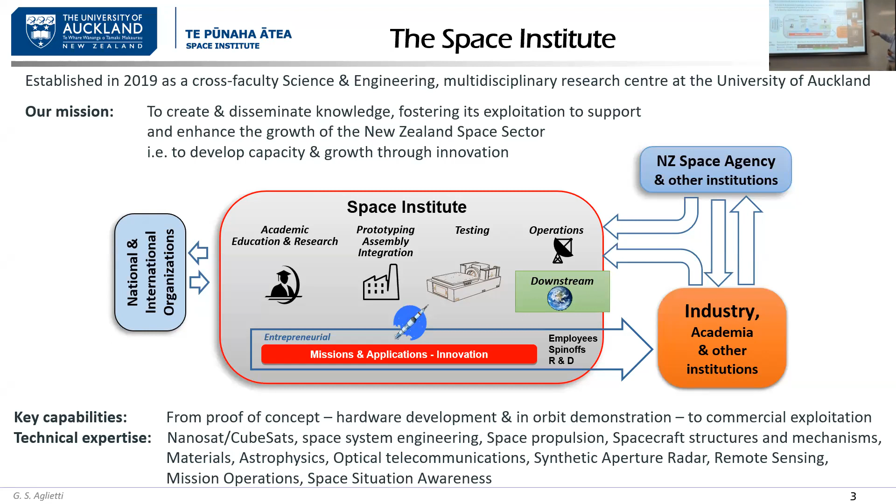As you can see from this diagram, we engage with international organizations, with industry, the space agency. So if we start to unpack a bit what there is in the Space Institute - there is a mismatch between what there is here and what there is there.

There is a bit of a delay here, but okay. If we start from the academic stuff - when I arrived, about 2.5 years ago, I noticed that in New Zealand there wasn't really a course in any university that was covering space or aerospace, and the sector really wanted to have people with this kind of expertise in order to grow and hire new staff.

So we set up a new course, a new master in aerospace engineering, and various other educational activities. And again, we started also a lot of research activities.

Some were already going on. There were also some activities with the APSS, for example - I'm sure you are aware about those. But again, we started also to develop further space technologies.

And in particular, there is a growing research group in space situational awareness. Maybe in one of these sessions in the future, you can have speakers specifically about space situational awareness.

And then if we talk about the various areas here - prototype assembly and integration - that's important because, again, when you have your ideas, it's important to actually see if these ideas work in practice.

So there is an area of the institute where you can actually go and try these ideas, put together your bits and pieces. We have a clean room just across the corridor, where you can start to develop your particular piece of technology.

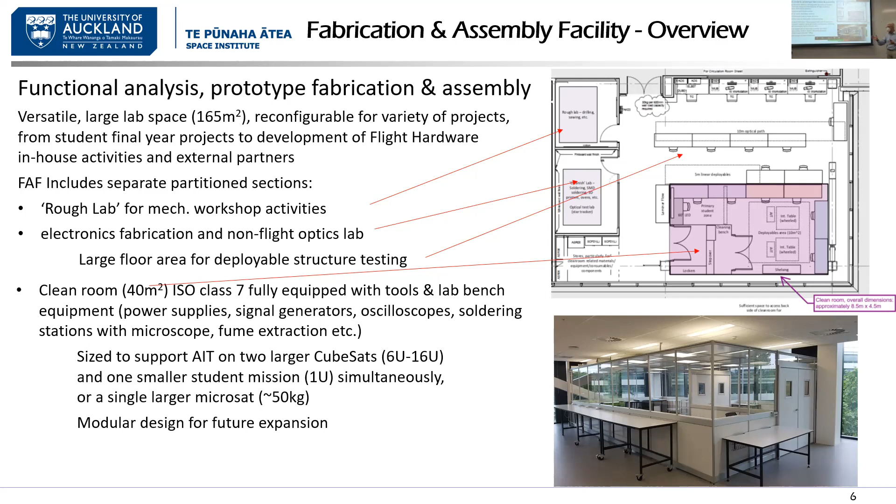But again, something has also been sized in the test facility to deal with stuff up to 50 kilos, which would be for a university facility quite a significant size satellite. All modular, so we will see how things go, and certain areas can be expanded or contracted.

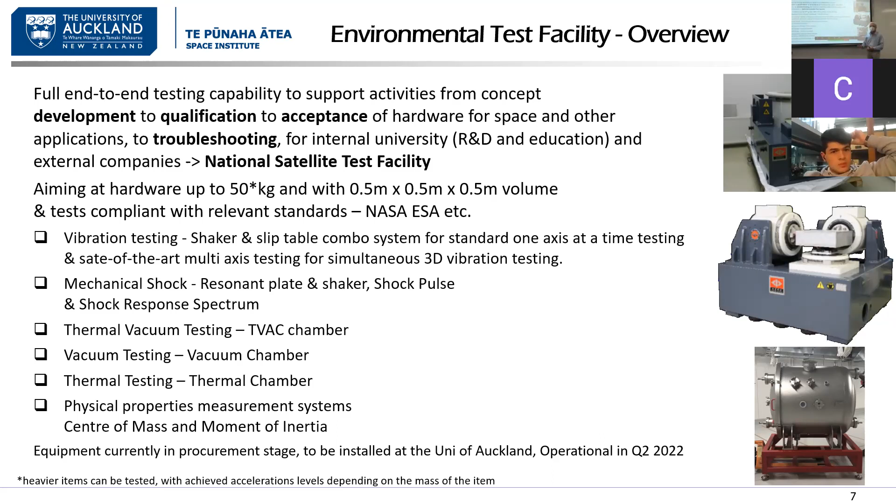With these facilities you test and make sure that the various technologies you are working on really don't fall apart due to the vibrations during launch, and once they are in space, they can really operate. There are other pieces of equipment downstairs to test, for example, mechanical shocks and other things that happen during launch.

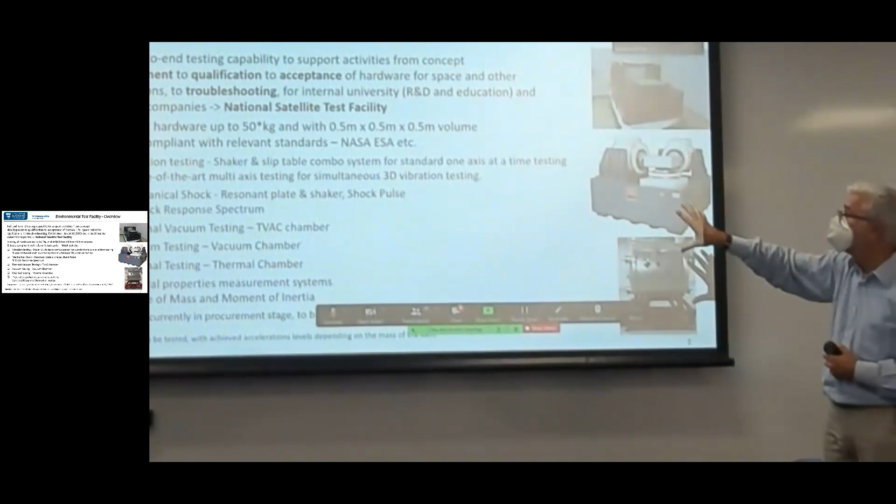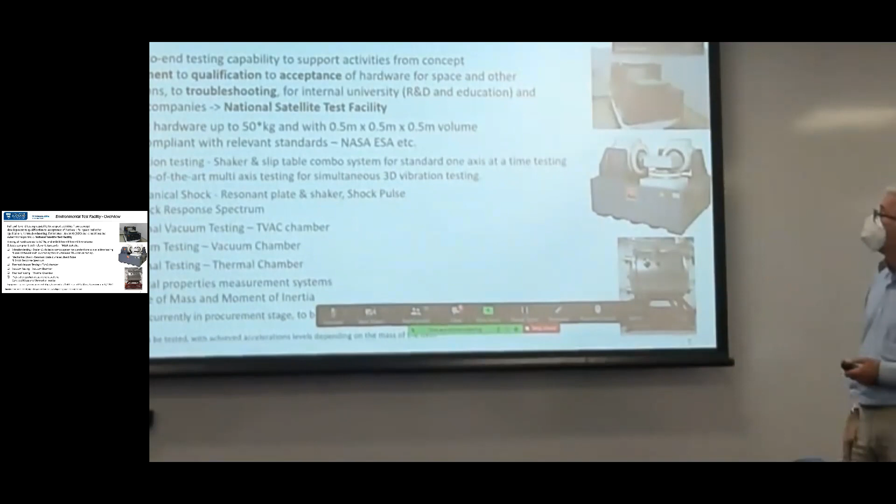In New Zealand this would be the only public, let's say, facility able to do this kind of test, because clearly there are companies that have this type of equipment, but they are private companies using these things for their own use. Instead, here we have equipment that will be used by ourselves for our research activities, our students, but also other little companies around New Zealand, startups, spin-offs and so on that don't have their own facilities, so they can come here and utilize all these things to prove their technology, without having to buy any of it themselves, because as you can imagine it's pretty expensive business.

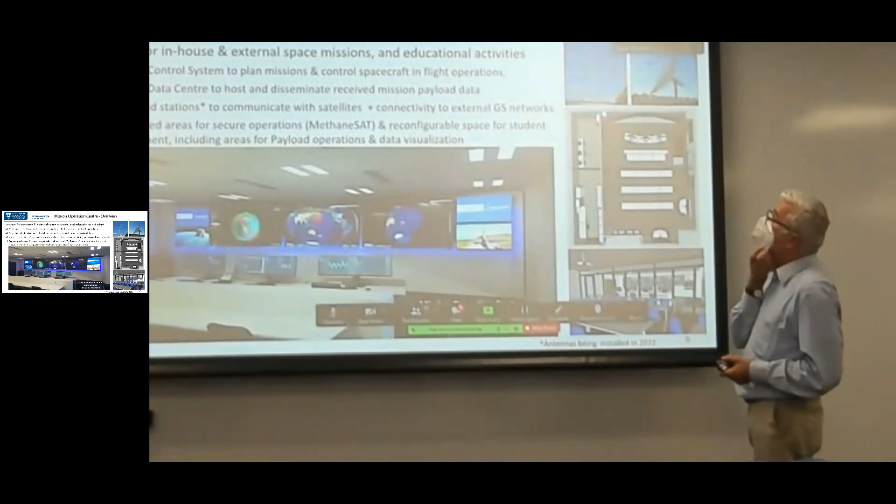And then again, the room where we are now, the Mission Operations Center, is connected with antennas that are not here on the roof, because that was a significant challenge. The antennas are in a field about 20 kilometers south from where we are now, but they will be connected with the Mission Operations Center, because it's important to be able to actually test the technology in space.

This room is so big and has got this particular layout that can be modified, because the idea is that it can also be used for teaching. So part of the courses we've seen before are actually about showing students how you really run mission operations - not just from the book reading the equations for the link budget, but actually students will be able to come here and see in detail how you run the operation, how you send the signal to the satellite, what you receive back, how you really operate things in reality.

If some of you have looked carefully at these pictures, you'll see that here there is a separation, which is not in the room at the moment - this one here. The idea is that in a few months we will have to put a separation in this room, but it will be something transparent that can be open, because sometimes there are things done in the Mission Operations Center that are a bit sensitive.

So you don't want people in the corridor coming in and looking what you're doing. So with this type of partition, you can obscure the partition, so it creates a safe area where you might want to do some operations and so on, and vice versa. In other moments, you might want to open the whole thing, so students can actually see what's going on, and you can use this for teaching workshops and various things.

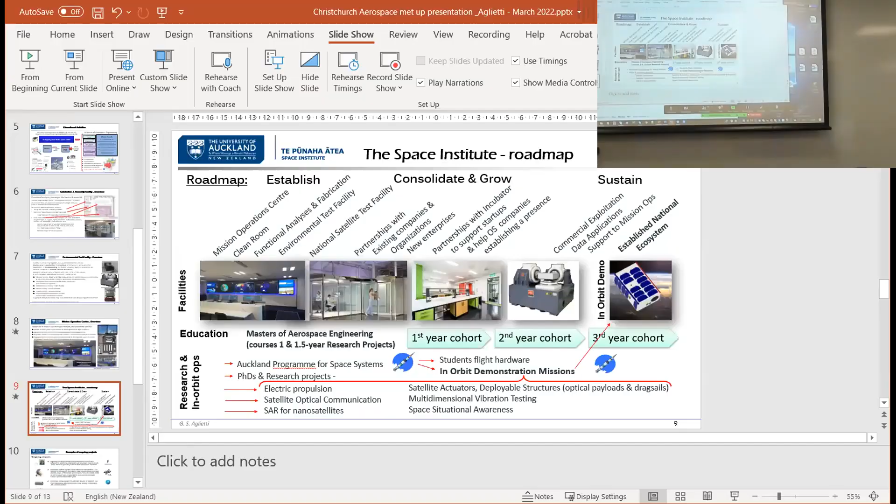So I will stop here. I don't know if you want to do questions now or later. Up to you. Shall we go to the next presentation? Were there some volunteers, or should I just assign a name? You can. I can take the mask off, you said? Yes, please. Should be fine.

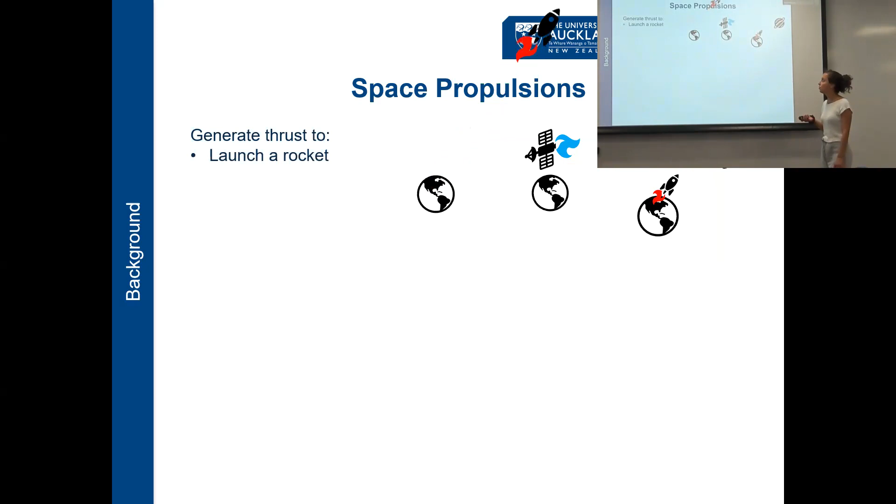So, what is space propulsion? Propulsion systems are basically the subsystem of, for example, a rocket or a spacecraft, and they're used to generate thrust. For example, if you want to launch a rocket into space, you're going to need a propulsion system. If I want to change the attitude and orbit of a satellite, that is done through propulsion systems. But also if I want to send a spacecraft to another planet or another satellite.

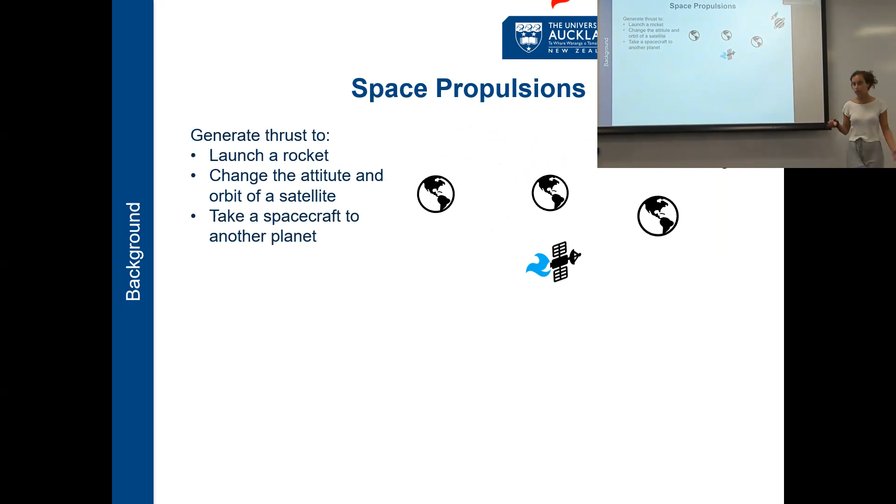There are two main categories of propulsion that you can have for space applications. One is a chemical propulsion system. Basically you're burning fuels, you're having a combustion reaction, and that's going to create your thrust. The main example is rockets. Rockets are launched through chemical propulsion systems.

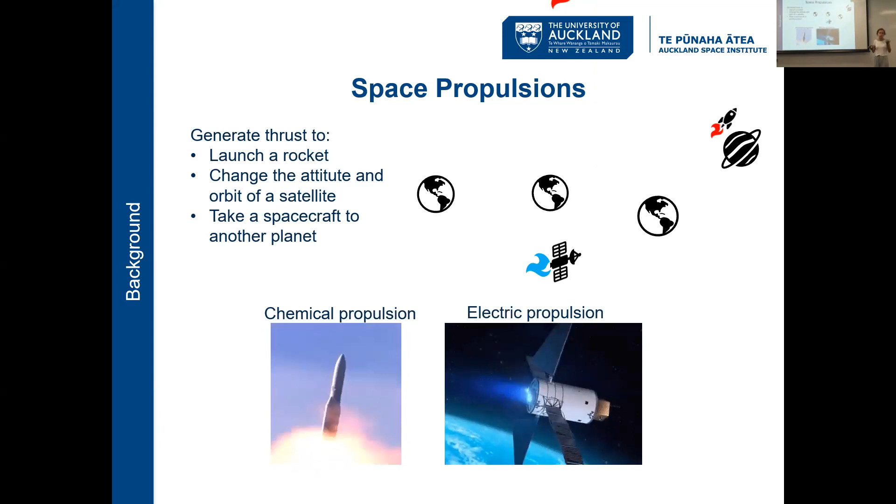The second big class of propulsion systems is electric propulsion. Basically you're using electric power, and that can be, for example, electrothermal energy or an electromagnetic mechanism, and that is what creates thrust.

As I mentioned in my presentation, I'm specifically working with what is called a radio frequency plasma thruster. I don't know if many of you are familiar with what a plasma is. Basically, a plasma can be considered the fourth state of matter. You have a solid, you heat it up and you can get a liquid, you heat it up further and you can get a gas. Then if I give more energy to the gas, what I can have is plasma.

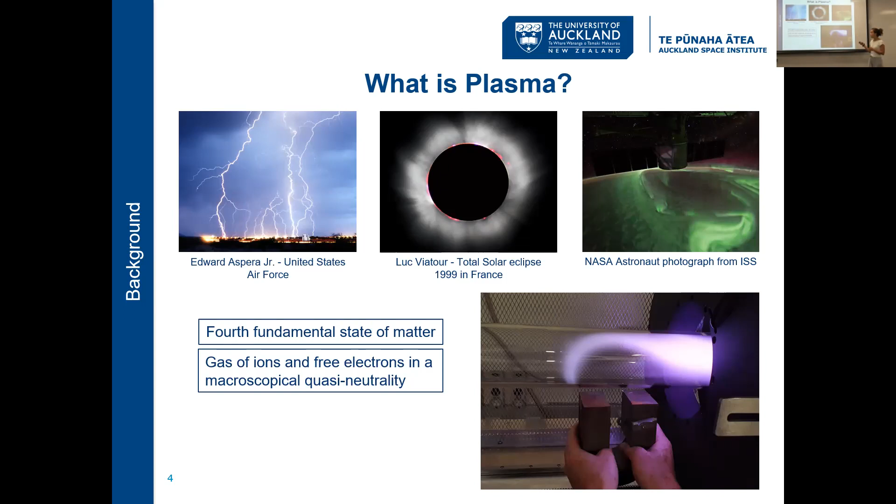You can think of plasma as basically a gas composed of ions and free electrons that maintain quasi-neutrality. Examples of plasma are lightning, which is an example of partially ionized plasma. All the stars, and also our sun, are made of plasma, but also the upper atmosphere, the ionosphere, is made of partially ionized plasma. And what causes the beautiful auroras is also plasma interactions. And here you can see a picture of us having fun in the lab with the plasma.

Because of all the physical mechanisms that govern the plasma, we can use electromagnetic fields to control the behavior of the plasma. So what are radio frequency plasma thrusters? They are a new technology of electric propulsion system that has been studied for the last 20 years. The plasma is produced by an electromagnetic mechanism that, put very simply, heats up a gas, and then you start having collisions between the atoms and electrons, and that is what creates plasma.

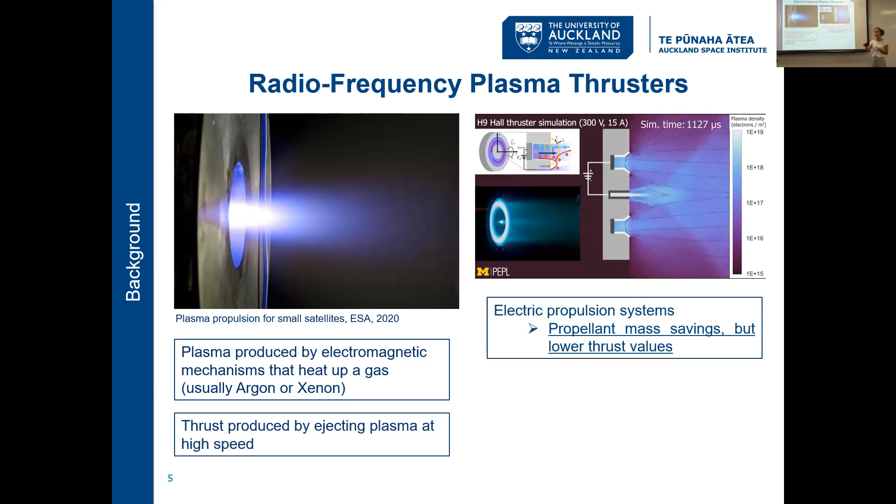What's an advantage of electric propulsion systems compared to chemical propulsion systems? If I want to move a satellite from point A to point B, I have to produce a certain change in velocity. To produce this change in velocity, if I use an electric propulsion system, I'm going to need less propellant. If I have less propellant, my whole system is lighter, my satellite is lighter, so it's also cheaper to launch. One disadvantage is that the thrust value is actually lower. So to go from point A to point B,

Okay, so to go from point A to point B is going to take me a longer time. That is not a problem if I don't have a time constraint on my space mission. But, for example, if I have a human mission, then a time constraint is a problem. So for now, electric propulsion systems have not been used yet on manned missions.

And last thing, an advantage of a radio frequency plasma thruster is that it has a relatively simple design. It doesn't use electrodes, it doesn't even have a neutralizer, compared to what is commonly used in electric propulsion, like Hall thrusters. So in theory, they could have a longer lifetime.

And now, as I mentioned, my PhD title is... There's a question, I think. We can go through it at the end, maybe.

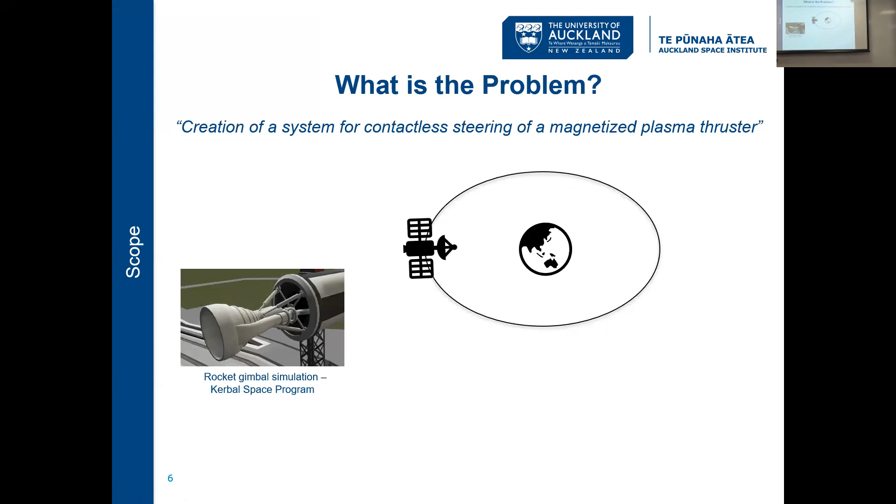Okay, yeah, it works. So as I was saying, up until today, the thrust vector of a spacecraft has been done by using mechanical systems, and that could be either a gimbal mechanism like on a rocket, or you can have vernier thrusters or reaction wheels. The mechanical system means that you have parts that tend to be pretty heavy, but they also move. So that could potentially add some failure modes to your mission.

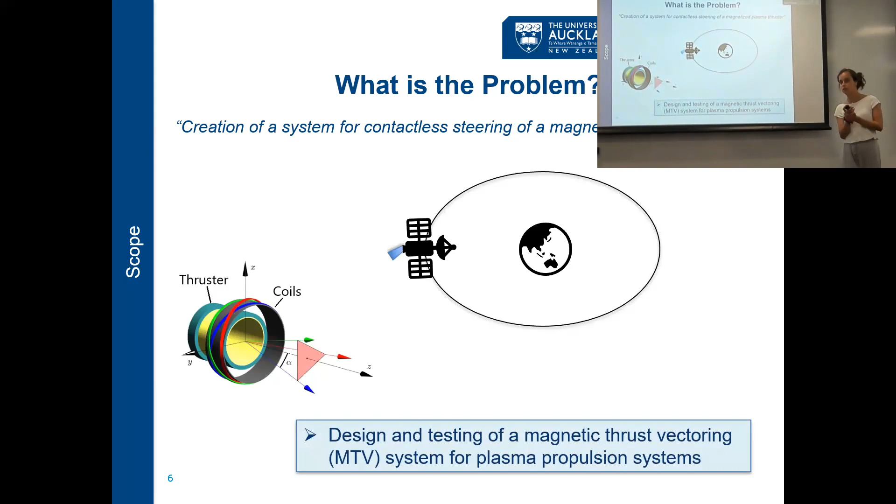So the idea is that for the radio frequency plasma thruster, as I said before, the plasma behavior could be controlled by electromagnetic fields. What you could do is control the magnetic field to actually control where your plasma beam or plasma plume is pointing. And so the aim of my PhD is to design and test a magnetic thrust vectoring system to use on plasma propulsion systems. The basic idea is I have 3 coils that are concentric within my plasma source of thruster, and by varying the current in each coil independently, I can control where my thrust is pointing.

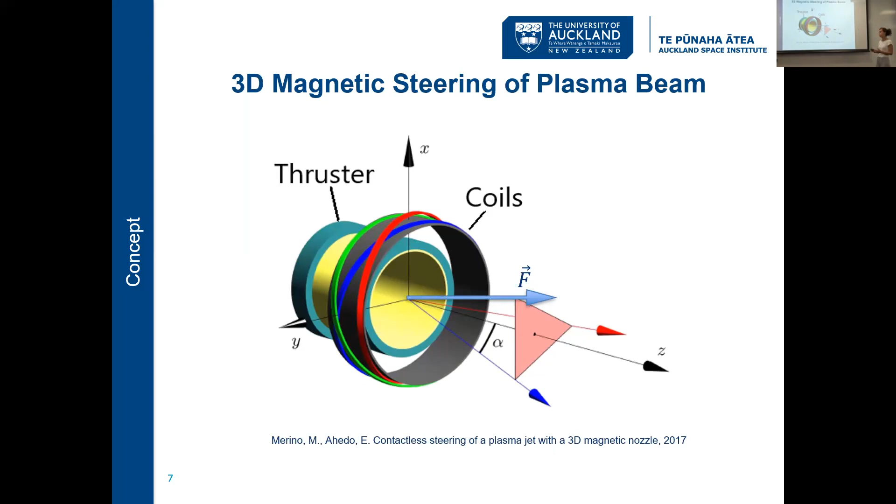These coils basically produce what is called a magnetic nozzle. So instead of having an actual physical nozzle, I have a diverging magnetic field that acts as a physical nozzle. And so, for example, I can play with the currents in my coils, change the magnetic field orientation, and boom, change the thrust vector. Now, this hasn't been tested before in this kind of system in 3 dimensions. So it's going to be interesting to see how the plasma would respond to such an asymmetric magnetic field.

And so how are we approaching the problem? By doing experiments. This is the setup that we have now in the Department of Physics in a lab, and it's brand new, like a month old probably. For my PhD, I'm working with 3 main components. This is the vacuum chamber, where the plasma will expand. It's a chamber in which I'm simulating the space environment, so I have a very low vacuum, basically to have an atmosphere-free environment.

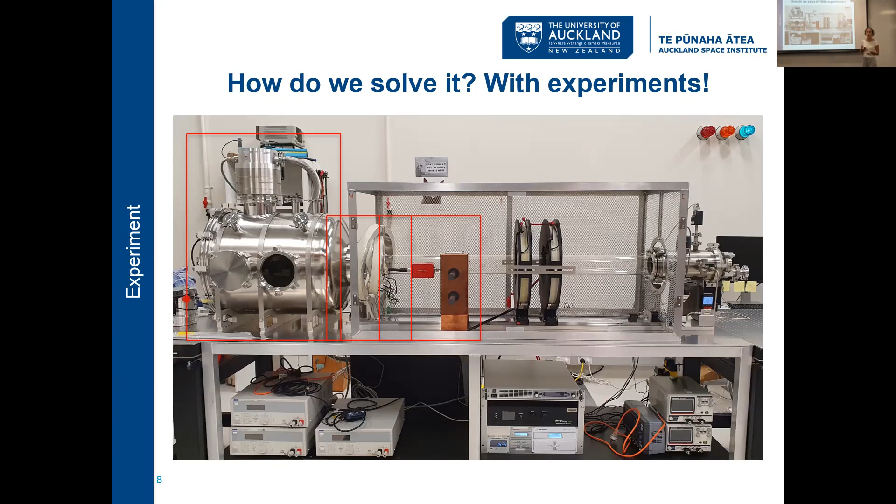Then those are the 3 coils that I will use to try and steer my plasma plume. If you can see, they have a kind of weird 3-dimensional rotational symmetry alignment, because I want to use these 3 coils to control my plasma in 3 dimensions. And then I'm going to use this, which is the matching box plus an antenna, and by feeding it RF power, it actually creates the plasma from the gas. And this is a nice picture of when the plasma is on. It looks like a lightsaber, probably.

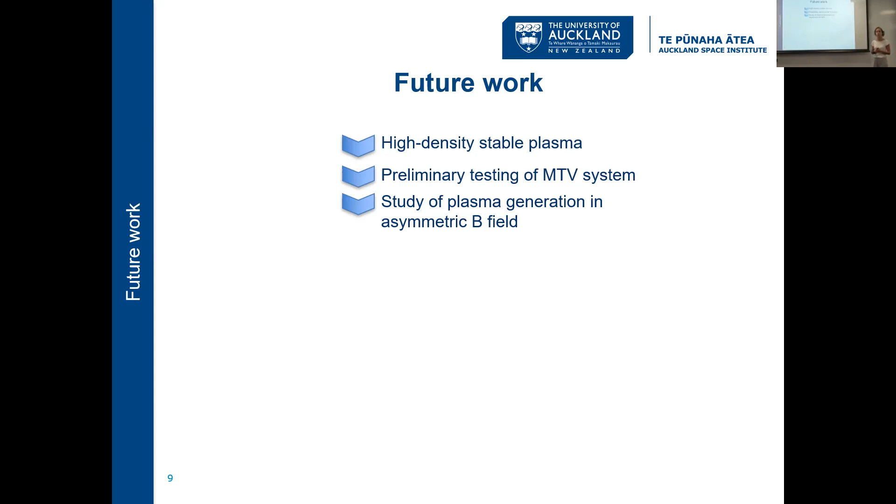So right now I'm trying to have a high density stable plasma in the new experimental setup. Once the deed is done, I can start preliminary testing of the magnetic thrust vectoring system. Then I would like to look more into the plasma generation mechanism in a non-symmetrical magnetic field. And of course, I will need to do 3D mappings of the vacuum chamber to characterize the plasma and see the plasma properties in such a magnetic field system.

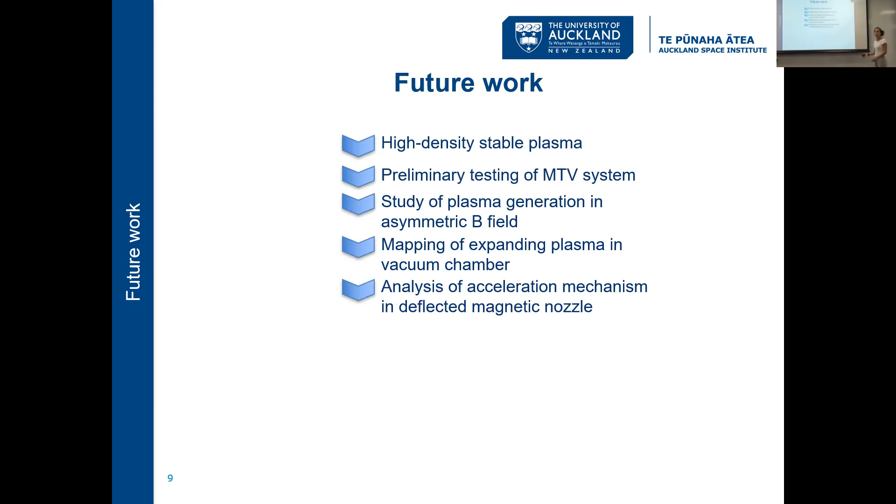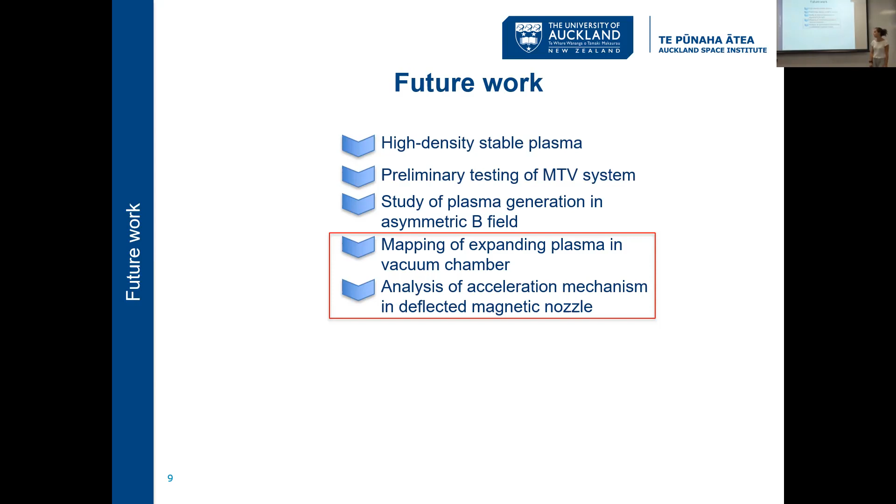And finally, I will look into the acceleration mechanisms that happen in a deflecting magnetic nozzle to see if all these systems can be used for quantitative applications or not. Those 2 last points of my future work are probably the biggest part of my PhD. And that's it. Do you guys have any questions?

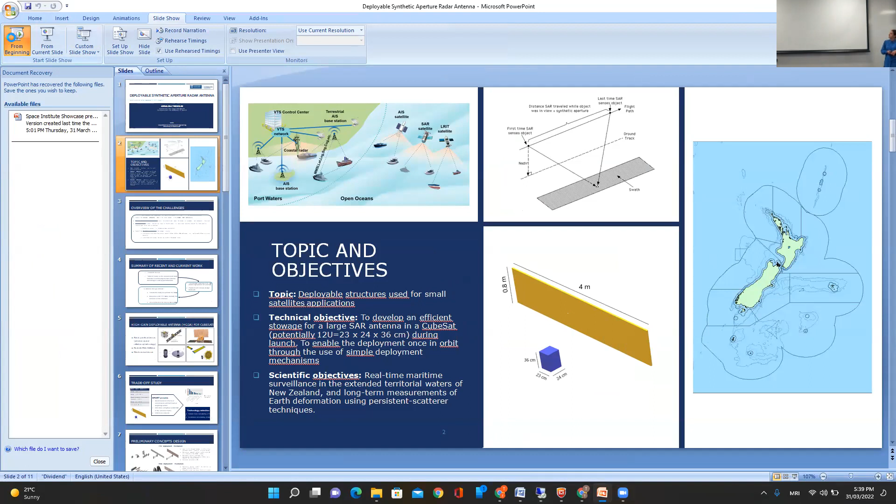That's the end of that. There. Okay, I think that, yeah, it works. Okay, share it onto the... Yeah, you have to share also. Yes, okay, here we go.

So, hello everybody, I'm Annalisa and I'm a PhD student here at the Space Institute. Today I'm going to show you in a few slides what my project is about and what I'm currently working on. From the title itself, you can easily get the field of my research, which is deployable structures. In particular, I'm trying to develop a nanosatellite concept of a deployable antenna, which is supposed to be implemented with a synthetic aperture radar.

So, what is the main topic of my research? Basically dealing with deployable structures that are commonly used for small satellite applications, and in particular, trying to find out which deployable structures and deployable mechanisms can be used to store and fold a large space instrument that needs to be folded compactly during launch and then deployed in space once in orbit.

In my case, my large space instrument is a deployable antenna of 4 meters length and 0.8 meters width, which aims to be implemented with SAR technology that so far has mostly been implemented in large, heavy and costly satellites. With my project it aims to be implemented in a CubeSat, which is the smallest category of satellites. We hope, of course, to do so with a simple deployment mechanism.

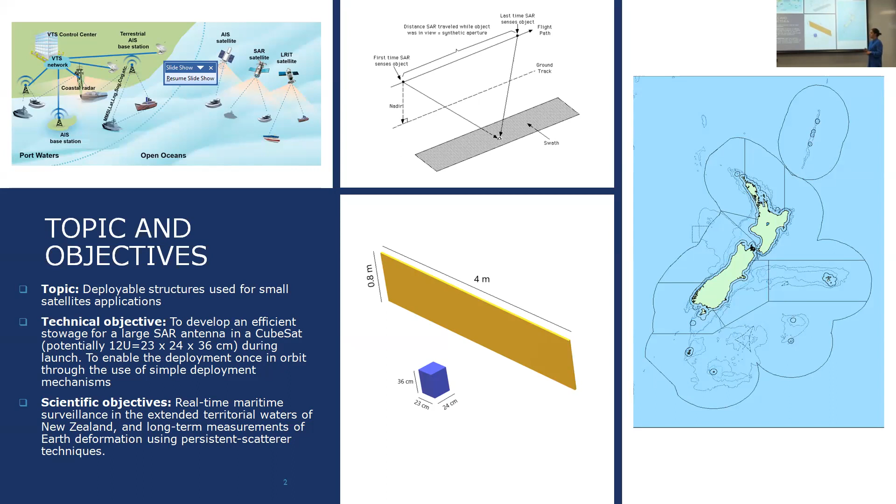What can the scientific objective be? It could be maritime surveillance in the extended territorial waters of New Zealand, for example detecting illegal shipping, or long-term measurement of Earth deformation.

There are a lot of considerations when dealing with a new project, for example a PhD project, and here I sum up the most critical challenges of my project, to help myself focus on the possible points of innovation and novelty, because, as you can imagine, most research has already been done, so your work should be unique and full of points of novelty. Here there's a list that I'm trying to

explore step by step. The first is the required trade-off between the minimum achievable size of the stowed antenna while maximizing the SAR performance. Following, it's the requirement to minimize the mechanical complexity of our system in order to avoid low reliability, but also to reduce as much as possible the number of components.

Another important step is the material selection for this antenna structure. The material choice is very important because the material should satisfy the mechanical requirements, but also reduce the electrical losses for the radio frequency system, so the antenna works properly from an electronic point of view.

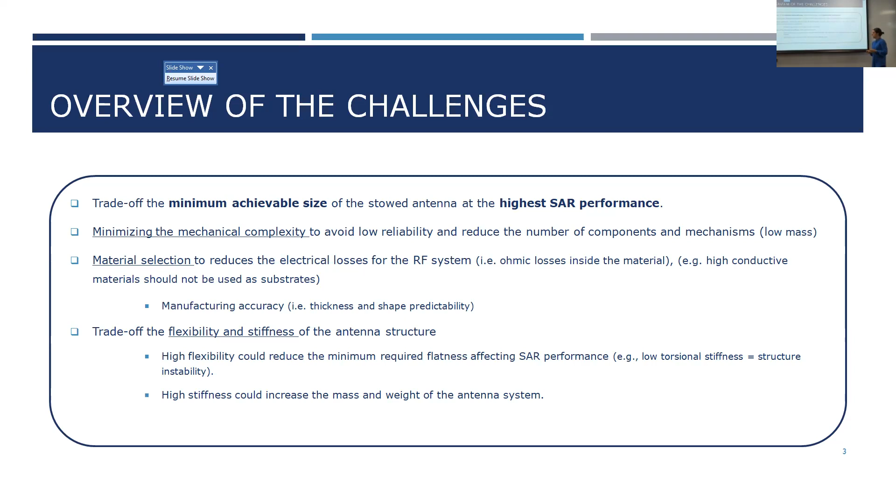A few months ago, I started my second year of PhD. During the first year, I conducted an extensive literature review on the most commonly used deployable antennas implemented with SAR. Then I set up a trade-off study to evaluate which of these deployable antennas can be suitable for a CubeSat application.

Most of these antenna technologies are used for very large satellites, and now what we are trying to do is find out which technology can be suitable also for a CubeSat application.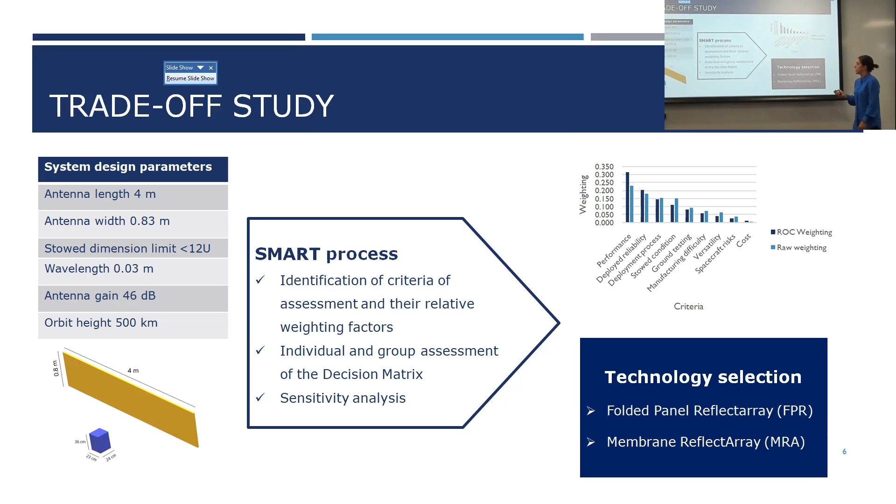We also conducted a sensitivity analysis with which we assess, evaluate, and also verify the robustness of our results. So the baseline concept that we achieve is a folded panel reflectarray, which can be resembled by these, and the second one is the membrane reflectarray, both with our reflector array technology. So here we suggest 2 deployment mechanisms for the folded panel and the membrane reflectarray.

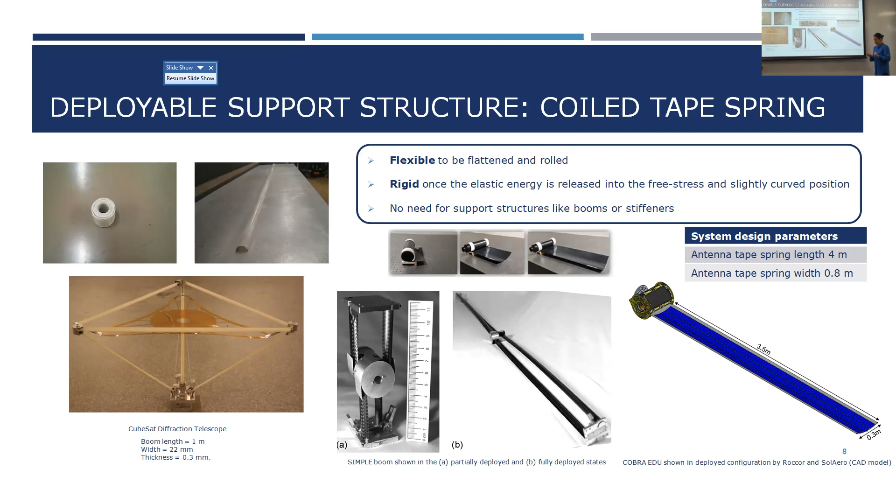In this case, it's a 3.5 by 0.3 dimension size, which is almost the one that we want to achieve. In this case, a solar panel structure. What I'm currently working on is the building of a parametric study.

Because I have very few system design parameters at the moment, I'm trying to find out which could be the optimal solution. So I identified some critical design variables.

As you can imagine, curvature is very important to gain stiffness or flexibility, so I'm trying to vary the curvature and thickness of the tape spring for this huge antenna, and also different material types. As I mentioned before, material selection is very crucial.

I'm trying to vary all these variables, looking at glass fiber, carbon fiber, composite, and so on, trying to find the optimum by conducting structural analysis and evaluating the first and second natural frequency of the structure, as you can see in some examples above.

I just want to identify which configuration is the most stiff, so that once the antenna is fully deployed, it can ensure it stays there.

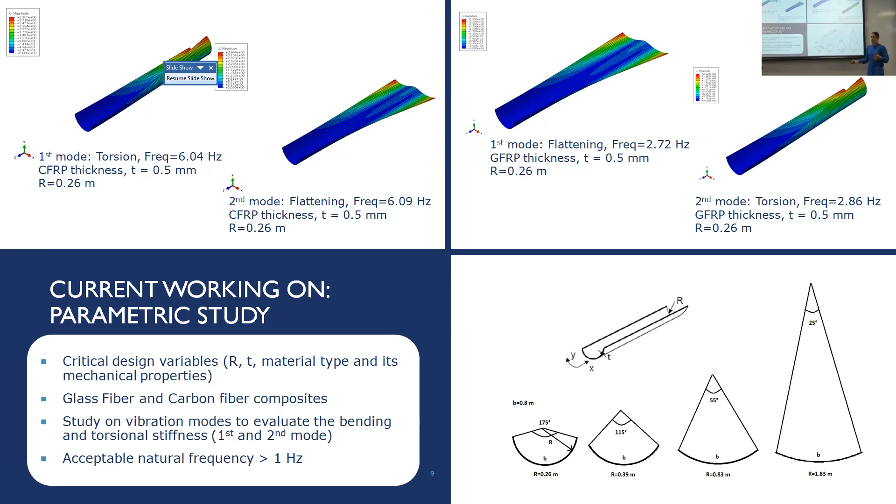This is the last slide, and then I've done. What can be the potential points and future work? Once I've defined the material and design configuration, I can move towards the deployment process, starting from finding the minimum radius of coiling without incurring failure of the material.

So cracking and micro-buckling and every kind of failure you can imagine. Then I will try to evaluate the bending and stretching energy of the coiled tape spring in order to evaluate what the requirement is to deploy the antenna.

This antenna aims to be deployed by itself, just thanks to the stored energy in the coil configuration, which is released once in space. I reported this example of a drag sail coil configuration, where a latch keeps the drag sail closed during launch, and then once in space it can be released by itself.

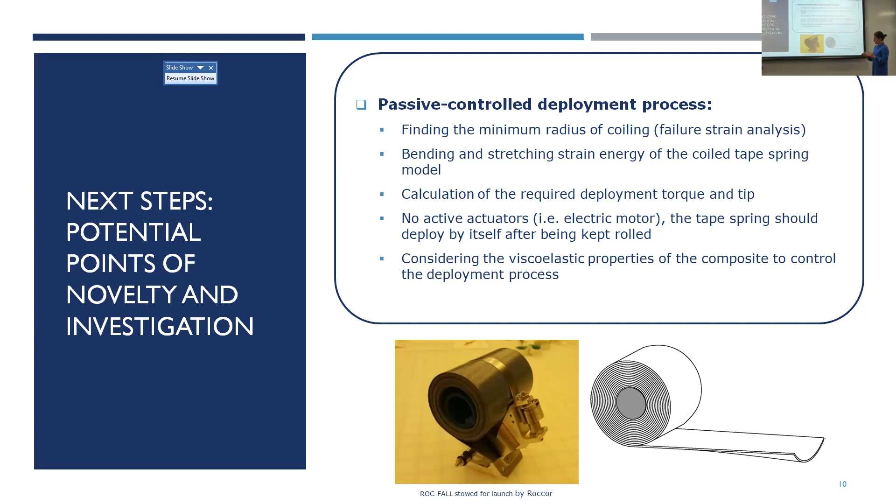With these techniques, we could encourage some high velocity deployment processes that we can also consider controlling, accounting for the viscoelastic properties of the material. So thank you, I hope it was interesting enough, and if you have any questions.

Are there any immediate questions? I think so. Okay, alright, we'll move on then. Yeah, sure, thank you.

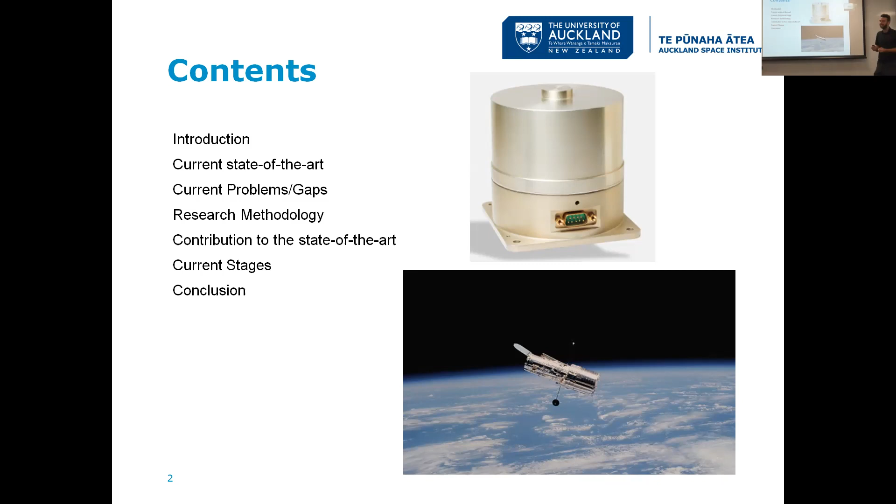So these are just a couple of the points I'll cover: a bit of an introduction, an overview of the state of the art, some current problems and gaps, my research methodology into that, and then for every PhD, the contribution to the state of the art and current stages of that before concluding.

Okay, so just a bit of background. Reaction wheel assemblies operate on spacecraft as attitude control devices. They're a really easy and efficient way to point your spacecraft in the correct direction without having to use precious fuel. When they operate, they can cause detrimental effects to payloads and other sensitive equipment on board.

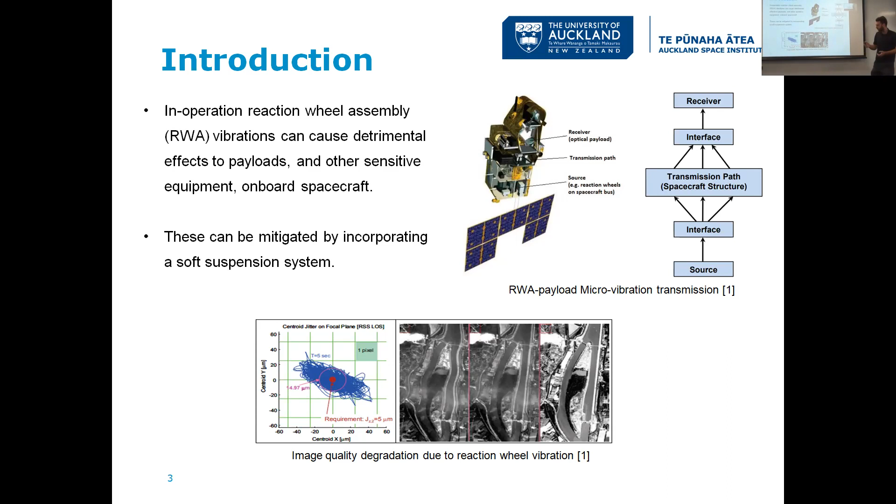Okay, and then just a bit of background on the current state of the art. The earliest research was into NASA's Large Space Telescope, later known as the Hubble Space Telescope. There's a really good literature review that Dennehy completed in 2019, which really covers all the modeling, the disturbance modeling of reaction wheel assemblies.

The main takeaway from the research up to date is there's been an excessive amount of research into fixed reaction wheel assemblies. However, the soft suspension reaction wheel assembly has some research gaps, which I'll cover now.

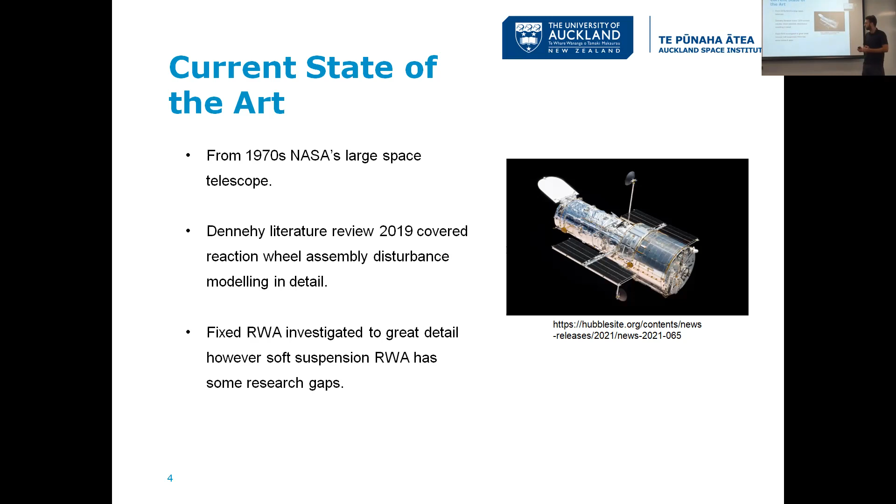The second problem I'll be looking into is characterizing the effect of introducing a soft suspension system into the reaction wheel assembly and trying to minimize these unwanted vibrations. The third one is experimentally investigating what happens when the reaction wheel axes are not fixed with respect to the spacecraft body.

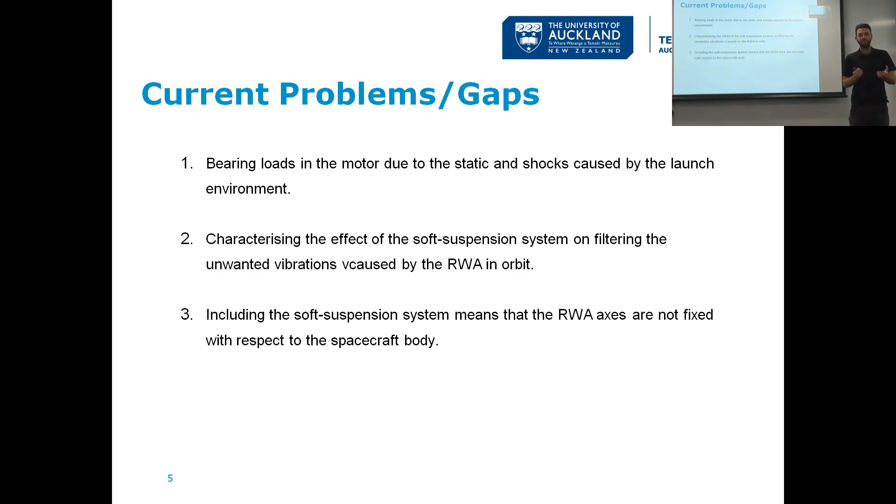I think we have a master's student covering the mathematical side of that at the moment, looking into it.

So our initial research was a design optimization, similar parametric studies of reaction wheels in FEM, looking at various parameters such as the thickness of the web, the height of the rotating mass, the diameter, and what effect this has on the vibrations and on the resonant modes that the wheel will experience.

Then we wanted to experimentally investigate the actual shock loads experienced by creating this structure here that has three layers you might be able to see in the photo. In the middle is a layer of perspex, and inside this has quite a complicated structure that feeds the air.

The airflow comes through these blue tubes. There's a series of channels underneath this top frame plate that produces an air cushion underneath that central mass and also on the sides, so it essentially floats the mass.

That whole structure is bolted onto the shaker here, and then the vibration, like a sinusoid, is placed - well, it experiences a sinusoid. The accelerometers then measure the accelerations that they experience.

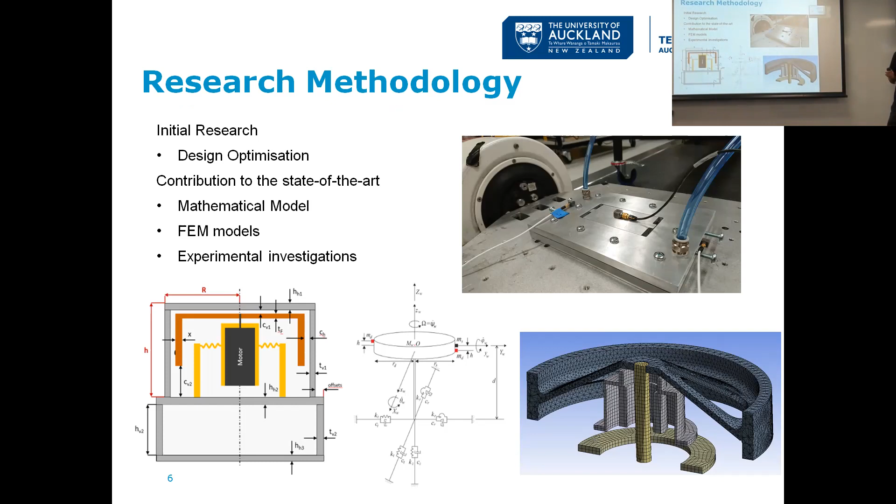So the design optimization, our primary goals were to maximize momentum capacity, minimize reaction wheel assembly mass, and minimize motor bearing loads. The way we did this was, as I said, parameterizing the reaction wheel into just important components.

In here, it's the height and the outer radius of the case, and all of these other components that you can see here end up being related to those. And then what you can do is you can find an optimal...

External radius increase while also minimizing that mass, which kind of sits about here, somewhere maybe 14 millimeters change in that. So that's an increase of 14 millimeters to find that optimum.

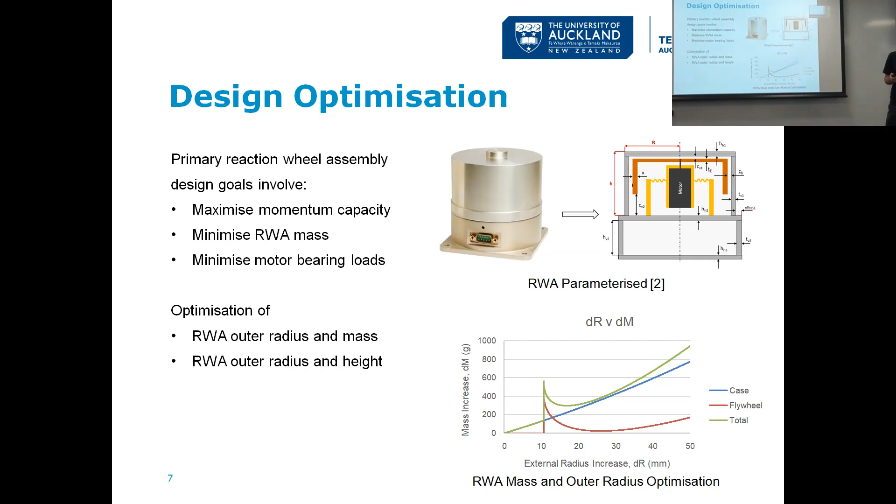So in January it would have been - colleagues of mine, Dr. Vladimir Yotov and Mattia, another PhD student - we submitted a paper to the SciTech conference, just essentially covering what I'm talking to you about today.

Vlad focused a lot on a mathematical model to visualize the 6 degree of freedom and identify where and when those impacts are occurring. Mattia focused a lot more on the finite element analysis, and then I looked at the experimental side.

Next slide. All right, and this was my experiment again. As I explained before, there's an air cushion underneath, so that allows us to ignore frictional effects when we're looking at the impacts that are produced, and we want to initially locate those resonance or impact points for various gap sizes.

So the gap between the end of this impactor here and this one here, this gap between the impactor in the middle and the frame, can vary depending on the size of the impactor that's placed in the middle there. And then after we've identified those interesting points, we then increase the sampling rate around those frequencies.

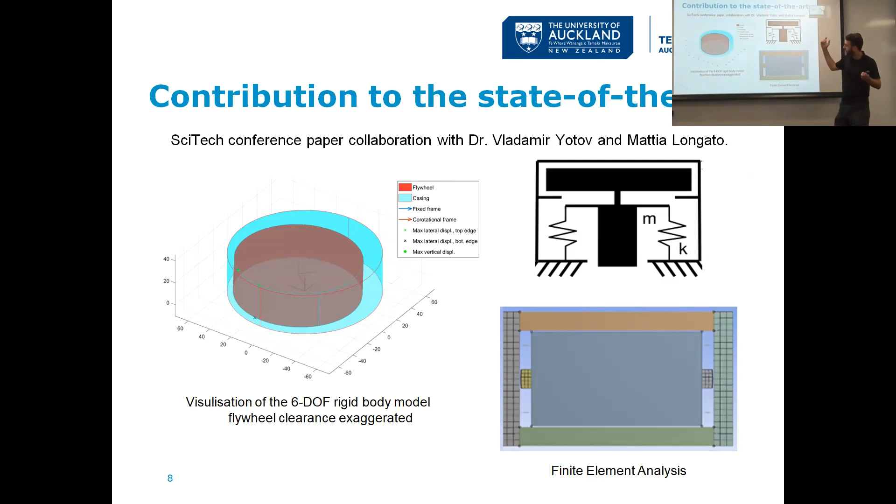Each of these parts are essentially representing a reaction wheel in one dimension. That central mass is similar to, for example, our wheel at the top. The outer frame is representative of the frame again. And then we have springs introduced that you can't really see, but they contact the center there and also contact the frame, and these represent that soft suspension system.

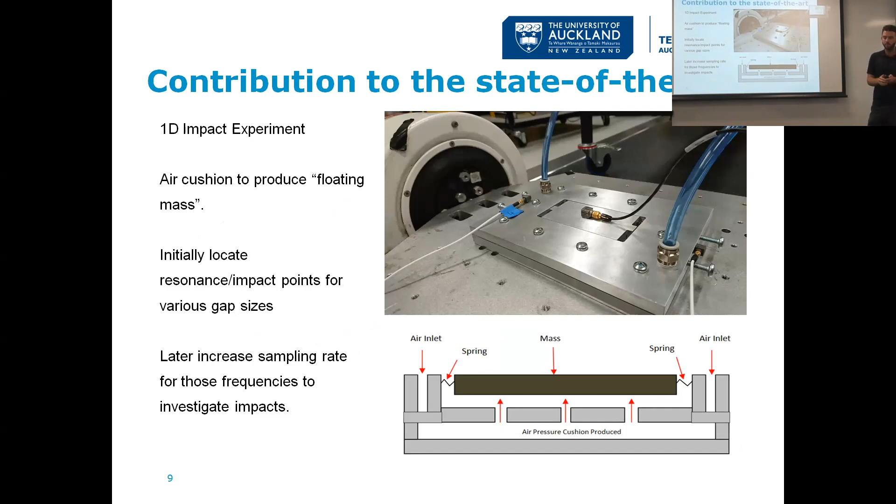So these are the 1D experimental impact dynamics experiment, part of the contribution to the state of the art. We're planning on extending that to build it into 2D and 3D impact dynamics in the future, and we have a couple of other experiments being planned at the moment.

One is just a spring stiffness verification. So when we do our CAD model and our FEA modeling, we represent our spring stiffness as K. We do this experiment to verify that what we're putting into the FEA model matches what we're seeing in reality. There's also a basic but useful experiment to characterize lateral loads inside the motor.

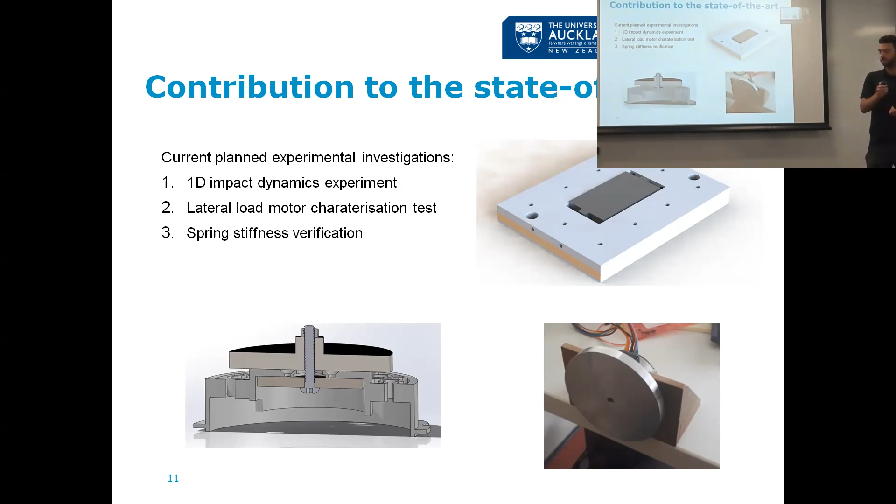Just to summarize, the main work that I've been doing for my PhD over the last almost 2 years is an optimization. I submitted a conference paper in collaboration with other researchers, and a lot of experimental work is ongoing. I'm possibly one of the PhD students with an industry partner, which is a possibility for many students - you can do your PhD with industry partners, as mentioned earlier in the presentation, that can assist.

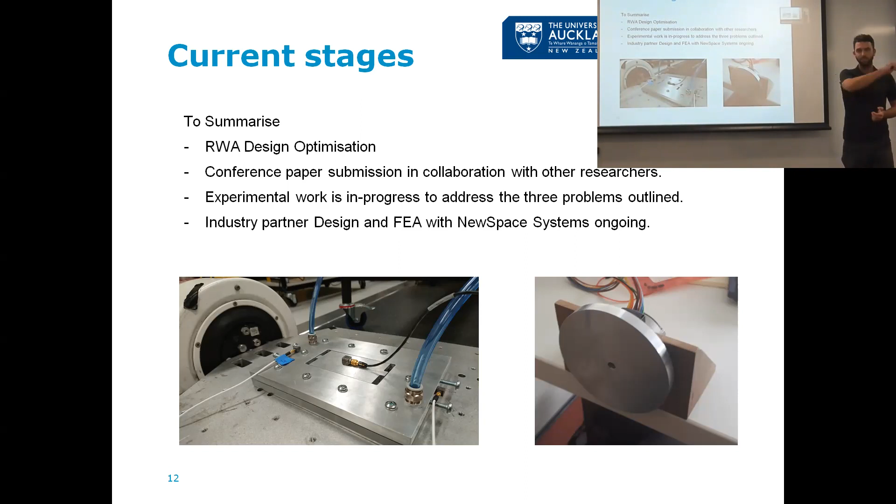To conclude, reaction wheel assemblies in operation can cause detrimental vibrations. Incorporating a soft suspension system can help minimize those vibrations. There's a few experiments going on at the moment in collaboration with other researchers to identify some of these launch environment impacts, and more investigations are planned to look at bearing loads and 2D and 3D impact dynamics.

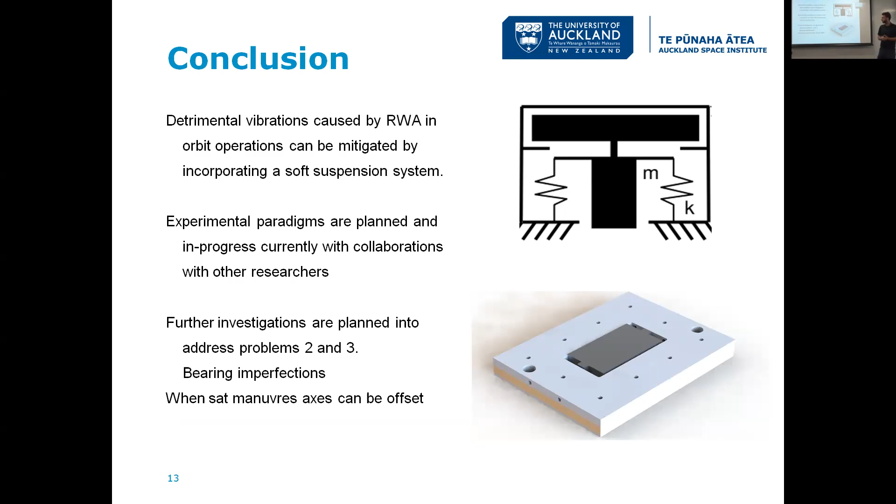Some references, and I think that's all from me.

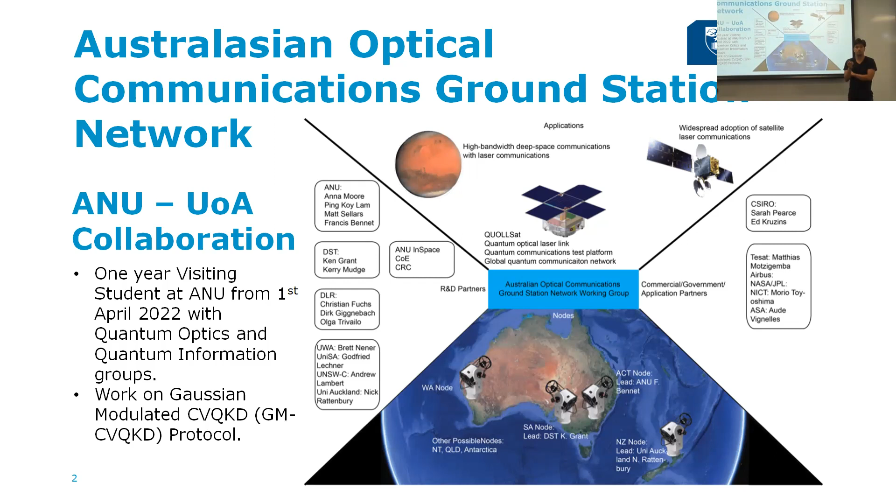So let's look at the background. What's the actual problem? So we're in the new modern space age now. We're sending a lot of satellites into space, and our previous method of communicating, radio frequency, is becoming very, very crowded, and it's acting as a bottleneck when exchanging information from space down to Earth. A solution to this is optical communications, free space optical communications, by going away from the radio frequency spectrum into ultraviolet, visible, and infrared. And this promises greater frequencies compared to radio frequencies.

So as I previously mentioned, continuous variable QKD, this is the method of quantum key distribution I'm looking at. So there's the wave particle duality of light, where light can act both as a wave and a particle. This one uses the wave nature of it and encodes keys in what we call quadratures, and that is the amplitude of a laser and its phase.

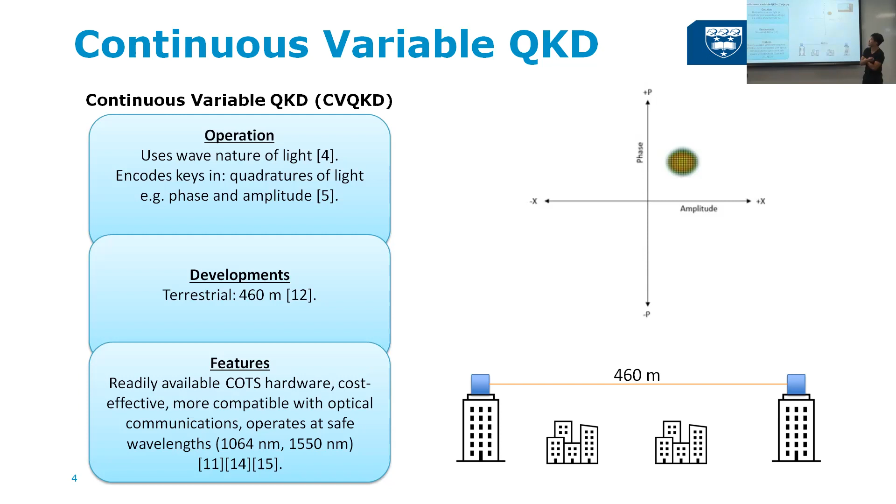Right now, there's only been one deployment outside the laboratory, and that's 460 meters terrestrially between a transmitter and receiver in this protocol. However, it's got lots of really good features. One, it's really cheap. It's readily available, and it's more compatible with optical communications. And it also operates at safe wavelengths. So we can see here on this graph the optical phase space, and that represents the quadratures that it operates on. So this is the overall architecture between a CVQKD satellite and downlinking it to an optical ground station.

However, for the purposes of my 3-year PhD, I've simplified it to this, where we start off with a laser ground state, we modulate it where we encode certain bits to make the key. It travels through the atmosphere, gets noise injected into it. There's a potential eavesdropper, which we will explore later. And then it gets received on an optical ground station, decoded, processed, and it's detected through a heterodyne detector.

I should also let you know that because I am in a 3-year PhD, the timeline to have an operational GM-CVQKD protocol satellite is outside the scope. So I will look into high altitude platforms that act as the low Earth orbit satellite.

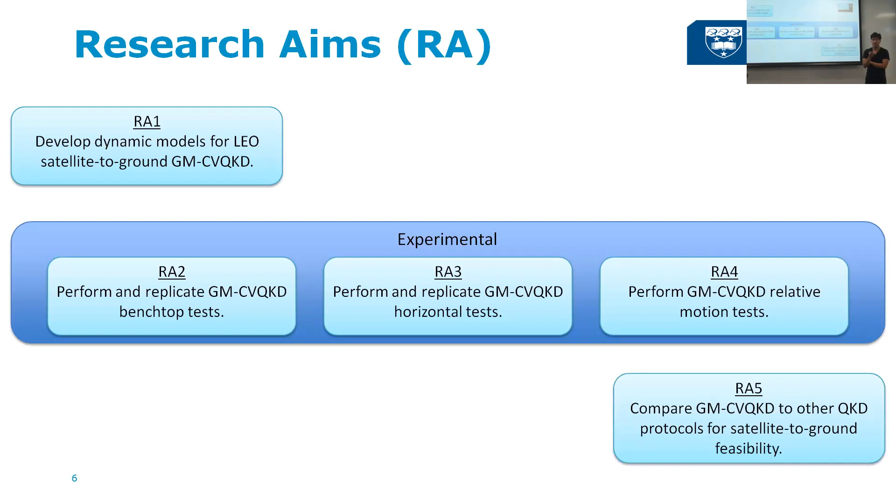So in that case, my first research aim was to do dynamic modeling of this scenario, and then we will go into experimental stuff, first in the lab, which will be in ANU because they have the protocol there. And then we're going to go outside into the field, have significant distance between it, like the 460 meters. And then what we're going to do is have relative motion in between it to represent an optical ground station and satellite where a satellite passes over it. And then after that, it's just basic analysis and comparing it to other QKD protocols.

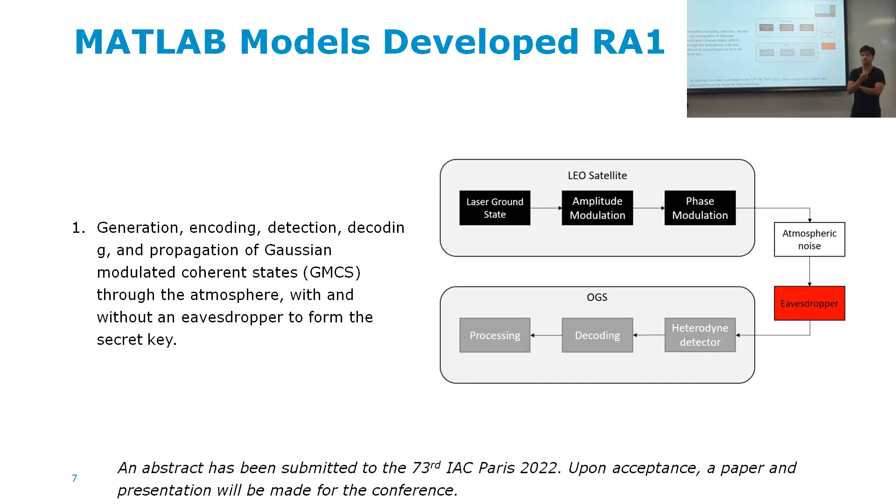So what have I done so far in my first year? I developed MATLAB models, which is really cool, of the scenario. So the first model was of the scope of this. So each compartment was modeled for, and the transmission of what we call Gaussian modulated coherent states. And we'll see that later on in the results, which is really cool because I did say that there is unconditional security here.

I've also modeled this overall kind of architecture. We have a satellite, the optical ground station, and relative to everything on Earth to calculate the total secret key rate. So there's lots of complaints saying that, you know, we all learn trigonometry, but we actually never use it. Well, ta-da, I use trigonometry here.

So yes, and an abstract is being submitted to a conference for this later on. And yeah, that's to calculate the secret key rate, which is how fast the key gets exchanged between two parties. And with that, we take into account geometric losses due to the hardware and the optics in the satellite and the optical ground station.

We also take in atmospheric losses because when the laser propagates through the atmosphere from the satellite down to Earth, it will have losses due to aerosols and atmospheric turbulence. And I also modeled the dynamic link distance, which changes because, well, the distance between the satellite and the optical ground station changes as well.

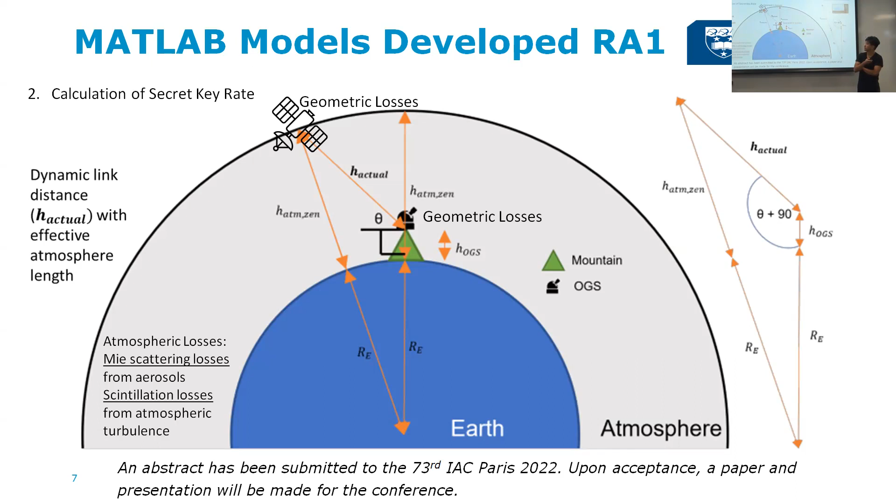It's also been said, based on literature, that 95% of detrimental effects on the laser are confined to the first 20 kilometers of the atmosphere. So then the effective atmosphere length changes as well in a satellite pass. And I did some analysis as well on the Doppler shift due to the relative motion, because there will be a frequency shift and a wavelength shift as well.

So then what we can say is, let's say that positive X, or any positive axis, encodes a 0, and any negative part encodes a 1. That right there encodes a 0, 0 in binary bits. And we send a series of these to the optical ground station to create the key.

However, with an eavesdropper, what we see is the total number of measurable bits significantly decreases and the number of bit flips increases, which is really bad. And then because there's a change in this, we can detect that there's an eavesdropper. And once an eavesdropper is detected, we can then terminate all communications and no one can hack us. And this is where the unconditional security of QKD and quantum communications comes in. We can see that closer here.

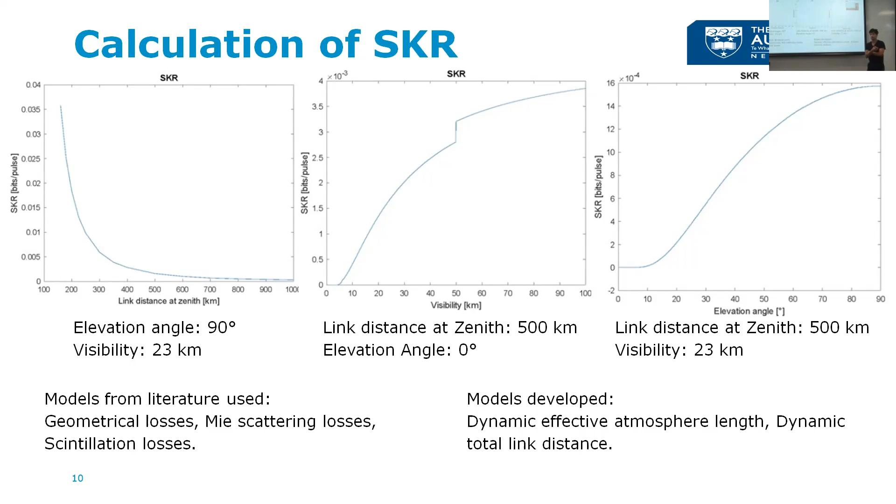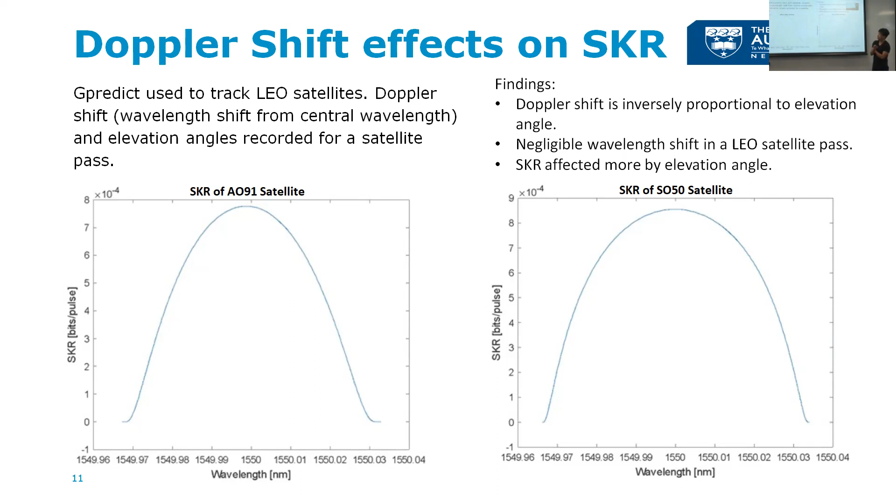And it's actually the elevation angle that causes this change in the secret key rate, because that was what I plugged into the model for each wavelength used. So once I touch down in ANU, Australian National University, the immediate thing that I'll be doing is benchtop tests in the laboratory and gaining experience of the protocol that they have there. And once that's been done, we plan to go around Canberra and conduct horizontal tests where there's significant distance between a stationary transmitter and receiver using the GM-CVQKD protocol.

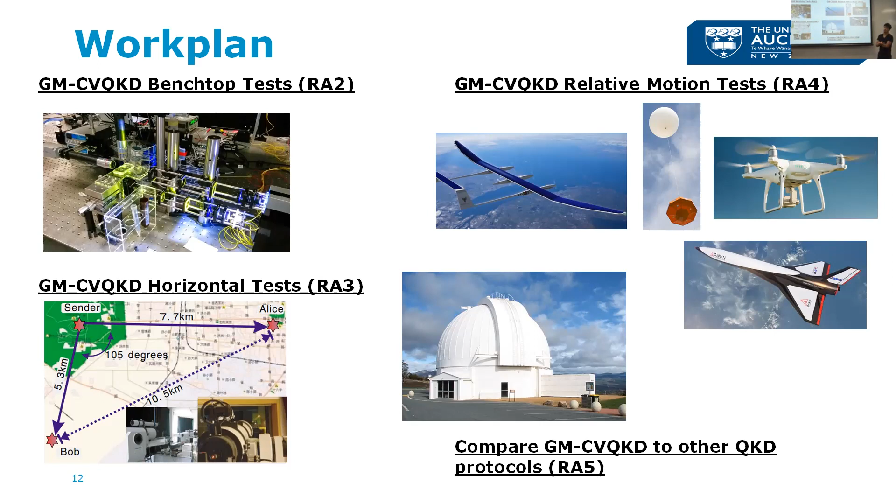And hopefully, if all things go well, we can conduct relative motion tests, not with a satellite, but with a substitute. Right now we're looking to operate it between an optical ground station, either in New Zealand or Australia, and something like the Dawn Aerospace Aurora Mark II, or the Kea Atmos, or even UAVs or balloons. And that'll probably happen in the later stages of my PhD. And yeah, just some analysis to compare it to other QKD protocols. Thank you.

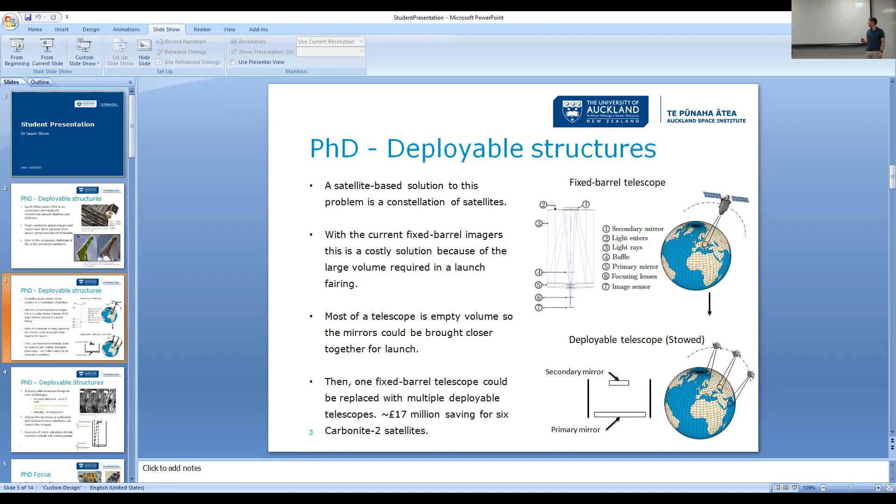Sorry, there's a problem with the... Oh, is it? I wasn't sure. Okay. I think the laptop's a bit slow. Quick. It's basically, that's what's showing. So we're good? Try moving slides. No, I think you have to change the screen that you're sharing. If you go... maybe that you share. Yeah, maybe we won't do the, what do you call it? Like, just don't click the slide.

Yeah, I saw. Right. I was thinking about leaving it like that if it doesn't. Yeah, it might be better to leave it without expanding the screen. No, but you have to share the different window. You have to share the window where the presentation opens. But, okay, it's working. Working? Yeah. You sure? It looks like this. Yeah. Okay.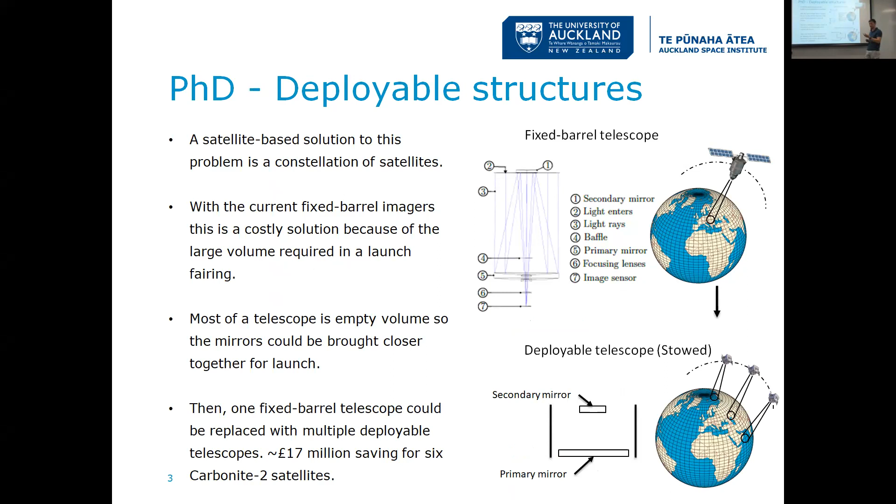So where was I? Yeah, so we can make these telescopes deployable and we can save on launch costs. Going back to the Carbonite 2 example, SSTL were estimating they could save £17 million by having 6 of these Carbonite 2 satellites going from 3 individual launches. So that would be 2 telescopes per launch.

So a deployable telescope is great because we can save money and we also don't have to keep the alignment during launch, but then we have some additional challenges that we have to solve. So we have to make sure we can accurately align once we're in orbit. We have to be able to reliably deploy. We need to make sure it's going to get there. And we also need to ensure that the stiffness of the structure is sufficient.

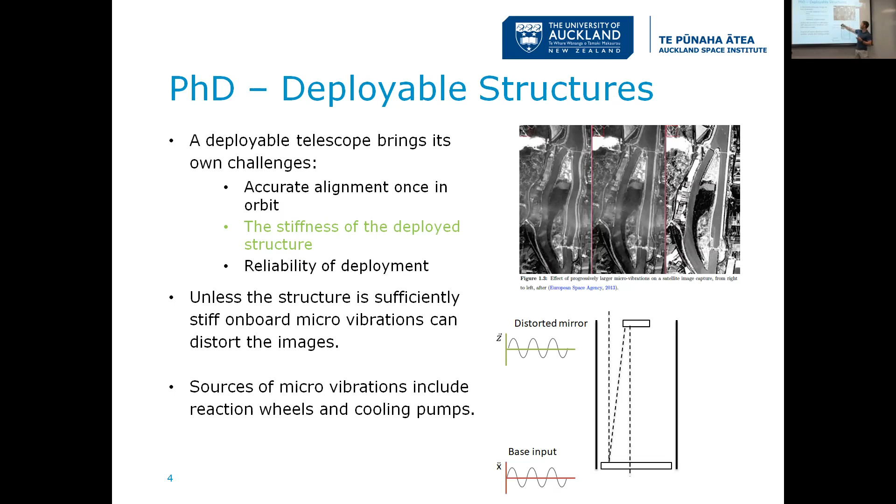So as Tom was touching on before, you can get onboard micro vibrations caused from reaction wheels and cooling pumps, and they act as a base input, like an acceleration input to our structure. And then the optical elements can be distorted and we can end up with the wavy images, which we want to avoid.

You just need a deployment drum. They're incredibly compact when you fold them up. So I've only got a short length here, but you can imagine a 2 meter length coiling to something that's a few centimeters in diameter. And they're also self-locking. So once they've been deployed, they're very stiff. So they form a nice beam element.

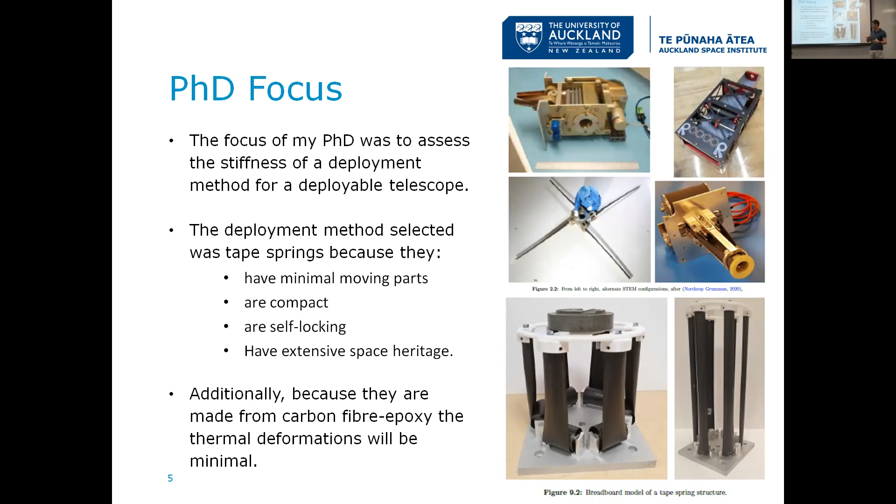And during my PhD, I developed this kind of breadboard model. So this is 6 tape springs that would be located radially around a primary mirror. And this is my kind of secondary mirror on top. So this is kind of half deployed and fully extended configuration. So this is for something like a CubeSat, something like 20 centimeters by 20 centimeters footprint.

So the stiffness of tape springs is driven by 3 factors. You've got the material properties, the geometry, and the boundary conditions. So the focus of my PhD was the boundary conditions. And broadly speaking, there are two types. You've got partially restrained and clamped. So the partially restrained allows you to have a compact coil. So the tape spring folds nicely into a cylinder. But the problem then is it's not very stiff because you've only partially restrained it.

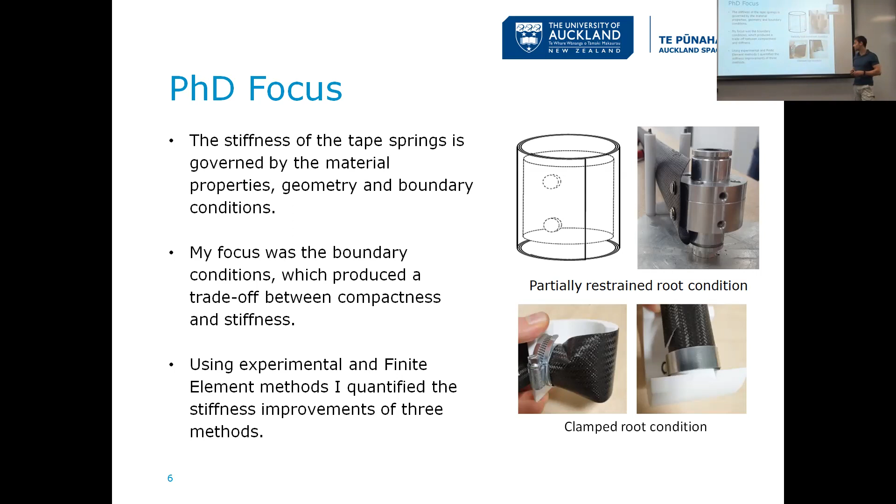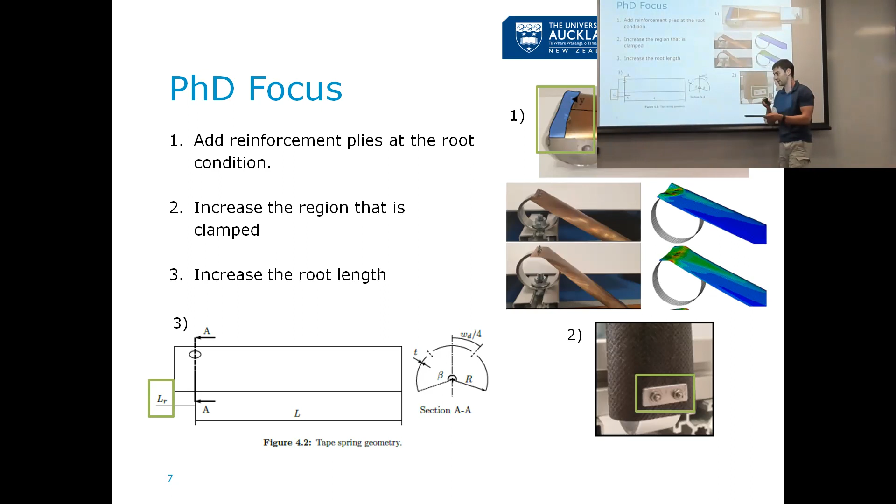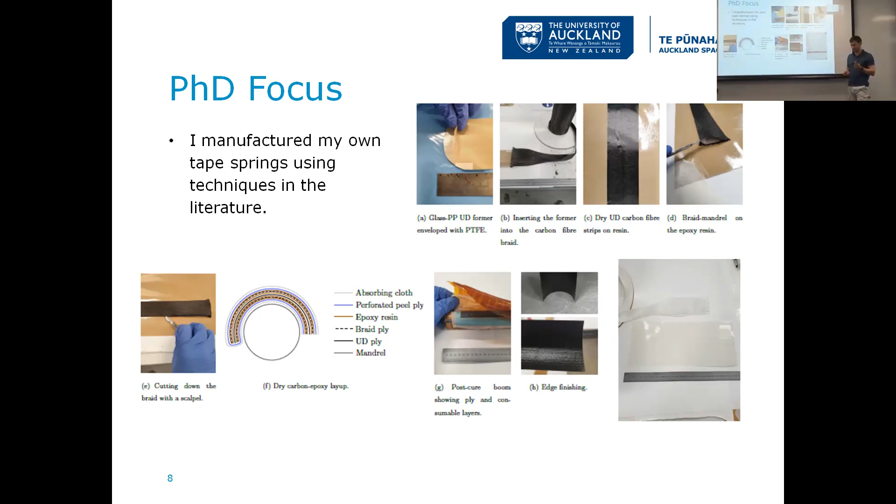So my PhD was quite practical. So you've already seen the breadboard model that I designed and built before. I also manufactured all of these tape springs myself, so there was a lot of composite design work in this. So starting off with the dry fiber braids and the resin films, you lay these all up, and then you apply your consolidation pressure and temperature, and you create the cured tape spring. I also worked a little bit with glass fiber and polypropylene as well, but carbon fiber is the material of choice because of the thermal stability.

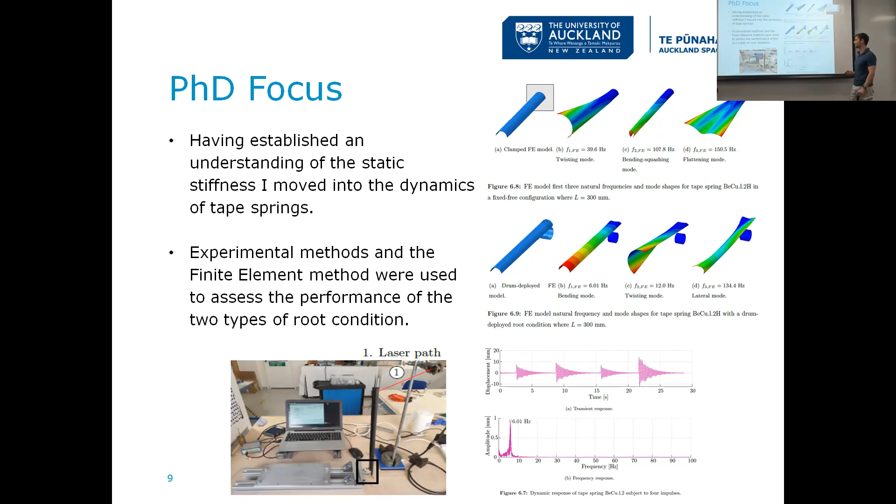So during your PhD, you're going to have a lot of opportunities at the Space Institute to work on other projects, like I did back in the UK, which is where I've come from. So I got involved with this deployable optics project, which is a deployable telescope we developed with SSTL. So it's very simple: 3 concentric carbon fiber barrels that are deployed using a large ring gear and then a series of smaller gears and lead screws.

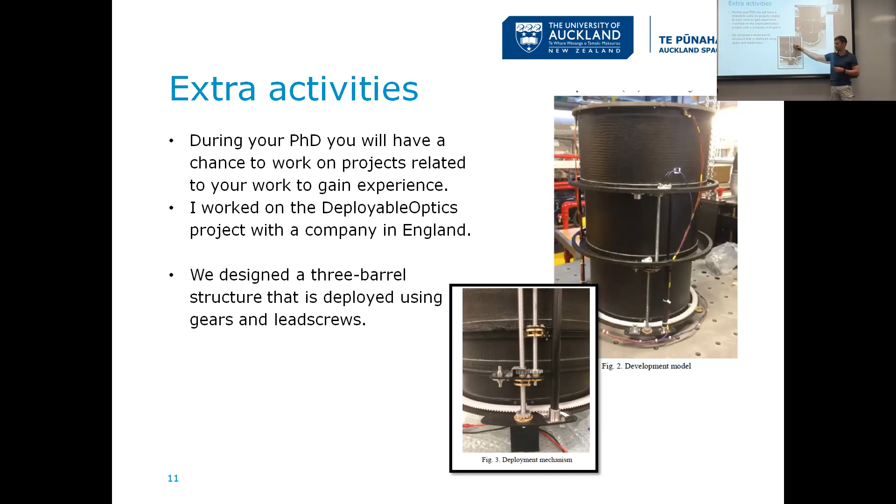We designed and built that, and then we did some structural testing on it. So this is very, very quickly some results from a sine survey. So you're characterizing the structure, looking at the first natural frequency, that sort of thing. So in this case, we're about 95 Hertz. Target was 100, so we're pretty much almost there.

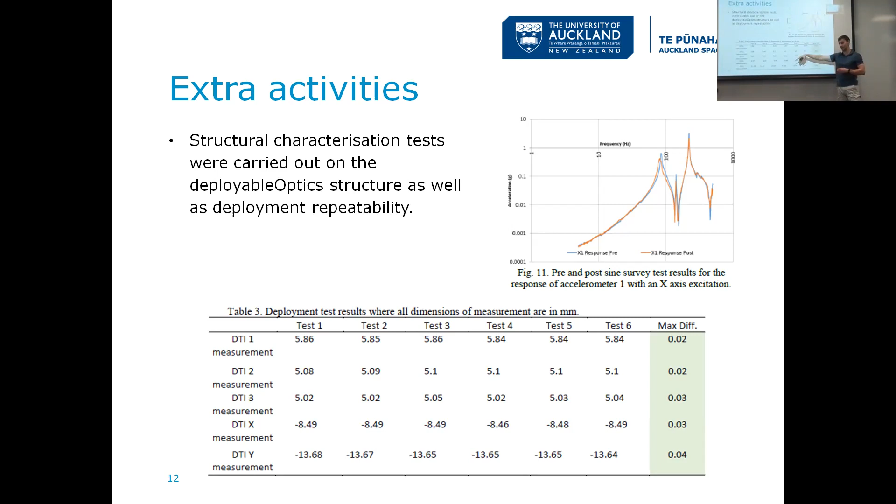And then we also conducted some deployment repeatability experiments, and the column you're interested in here really is the maximum difference between these 6 tests. So this is in millimeters, so our maximum difference was on the scale of 40 microns. And on that scale, we're probably down to the measurement accuracy. So it was very, very accurate in deployment.